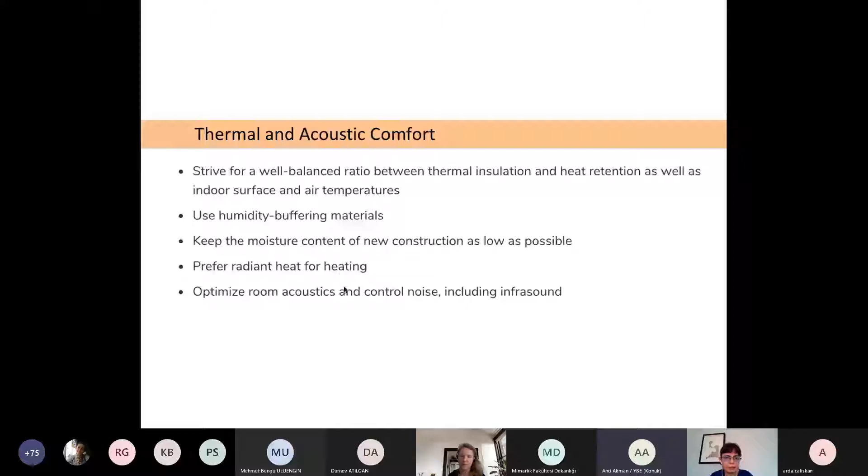The human-based design, harmonic proportions also from cultural and traditional buildings, not to lose this knowledge, not to lose these proportions from ancient times, and trying to transfer them to the architecture of the future. Later on I will show some examples which I think are the right examples for that, how you can take a traditional design and transform it to the future.

Sustainable environmental performances: minimizing energy consumption and using renewable energies. But we see that using renewable energies is not enough to have a good performance, to say it's a green building. We have to minimize the energy for the production of that building, for example. Then we can say that it's a green building.

In Turkey, what we have forgotten, let's say, is providing the best possible quality of drinking water. Today we are buying the water which we drink, paying money for that. But in socially higher developed countries like Germany, for example, the law says that the water which you have in your house, coming from the tap, must be drinkable. You don't have to pay money to drink water, and you don't have to pay money to have fresh air to breathe. It's the same for water and air.

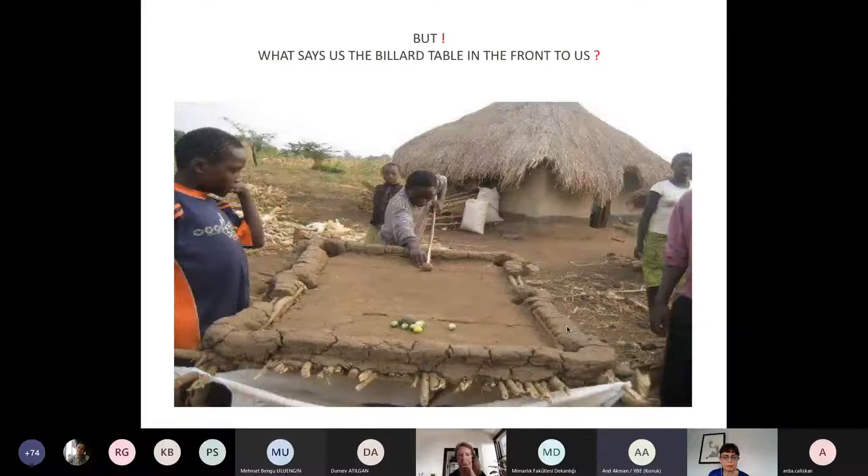So, what says this billiard table in front of that in situ structure? That's the big question. And my opinion is that maybe this billiard table will destroy the process of the social sustainability in this area. And because of this billiard table, a few years later, maybe they will demolish, break down these buildings behind, and will start to make something with metal, or something with bricks, or something which doesn't belong there.

And as an architect, I think that we have to try to see these kinds of pictures in that way. Not just saying, wow, billiard table, what a nice idea, but more thinking about what's the effect of this billiard table. Is it a positive or a negative effect? What will it be?

So environmental awareness is a condition for the formation of an in situ structure in architecture. And that's the big fight in our brain with our ego and our eco. And depending on how much our ego or our eco is developed, we make our designs, or we choose our living spaces.

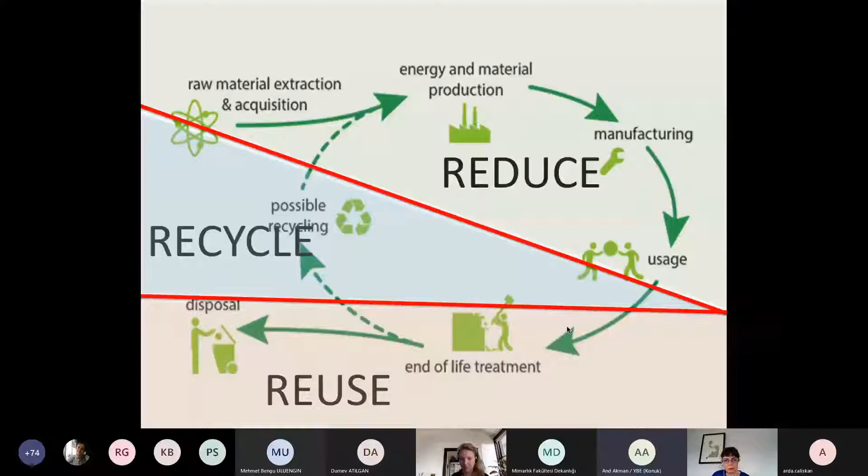So, an example with building ecology. I'm sure you all know this circle with the raw materials, the manufacturing, the usage, the end of life treatment, and then we reuse it or we recycle it, etc. But if we see that with numbers, we see that with the recycling or with the reuse, we can't reach a good performance. The most part of a good ecological performance is in the producing part of the building materials, and we have to reduce that.

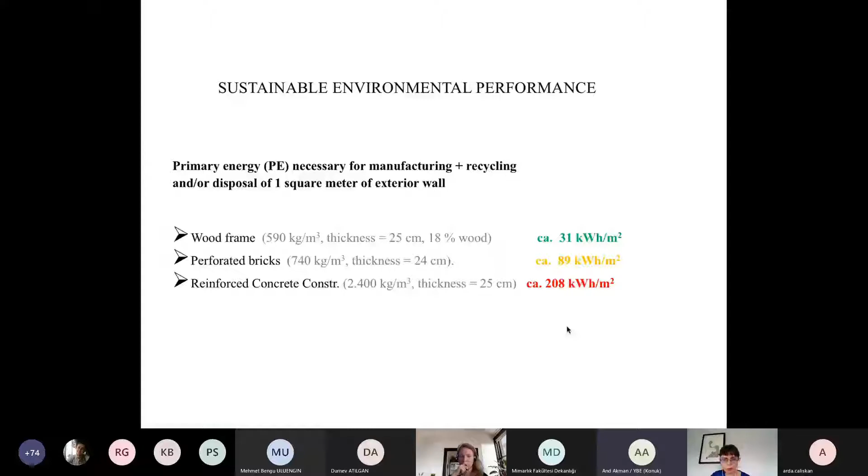So one example with this reduce part, sorry. Let's say, just as an example, we need a window for our building. We design it, and the need is a window. And here we take a decision and say, okay, it's a window, a wooden frame, or plastic frame, or aluminum frame, whatever. As an architect, we have to take a decision. And what we try to reach is in situ building, ecological building, a green building.

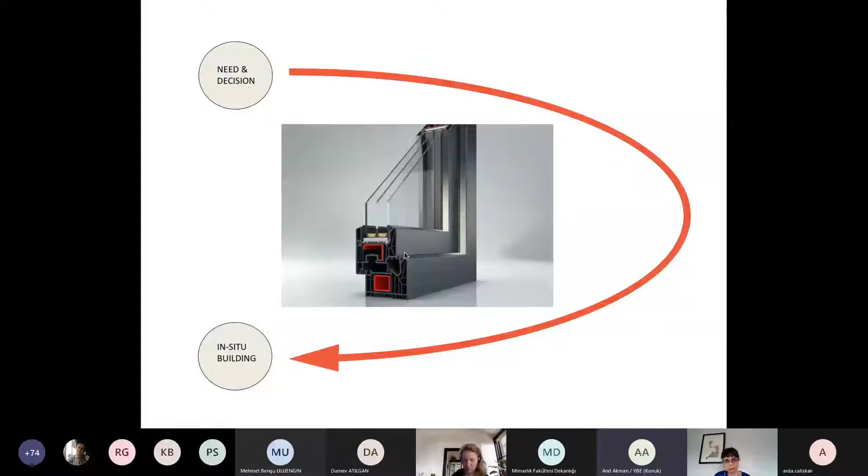So I will pass these slides now like a slideshow a bit faster. What happens? All these steps need energy and resources. Raw material extraction. For that, we need mineral quarries, machineries, organic resources, manpower. Then for the production of these, we need transportation. Again, for the transportation, we need lorries, roads. We have to build roads. We use railway or sea transport, and we need refineries, gas stations.

And that goes on to the manufacturing. Again, transportation is necessary, energy producing is necessary, and after the manufacturing, again, a transport to the dealers. And now when this window has reached the dealer, we as an architect or as a family who wants to build a house choose this window. And again, the dealer needs energy, and again, a transportation. And finally, at the end, with all these things which must be produced, which use energy, we only put the window in our building.

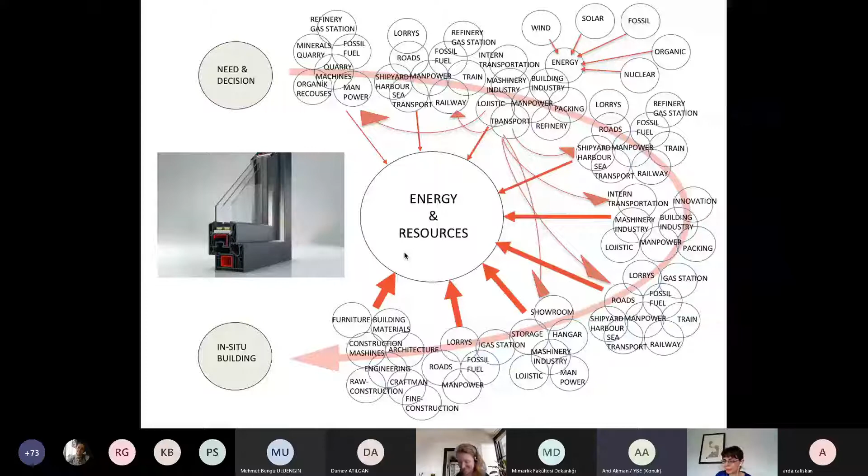That's all, not more. So the difference now in that case, is it a wooden frame window or a plastic frame window or an aluminum frame window? The decision is suddenly getting very serious, because we are responsible for all these consumptions.

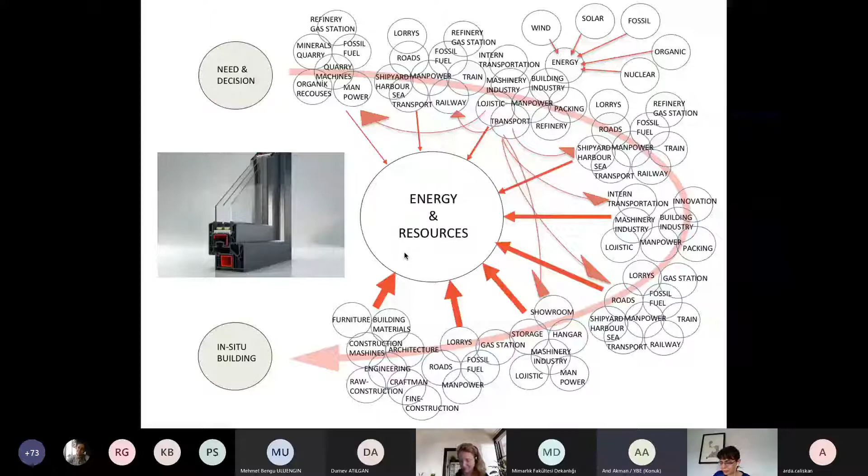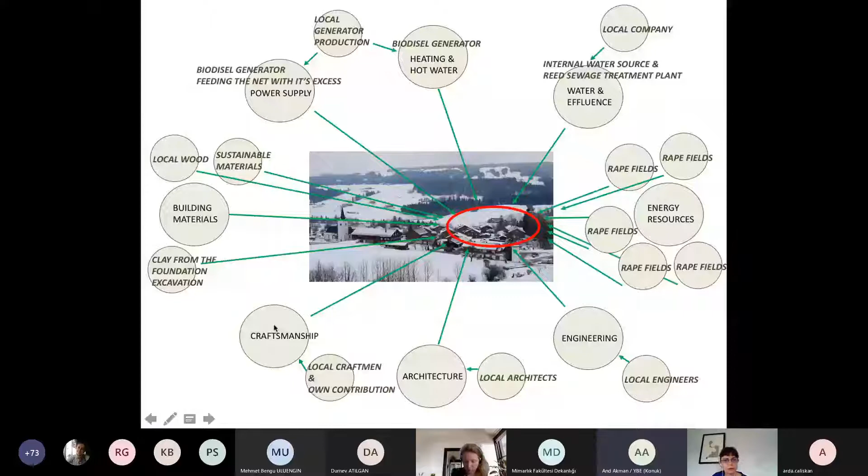And we used local companies, its own water and energy resources, the rape fields, kenevir, and the local engineers, the local architects, the local craftsmanship, etc. So as much as possible, we tried to do that. And as a result, that was this little settlement, 17 living spaces in 8 buildings, made with a wooden frame and adobe bricks and reed insulation, all building materials which don't need much energy to be produced. And another picture from the same, and also the design language is very adapted to the traditional design of the village.

So I don't know how much time I have. Can we have a little? Can you inform me, please?

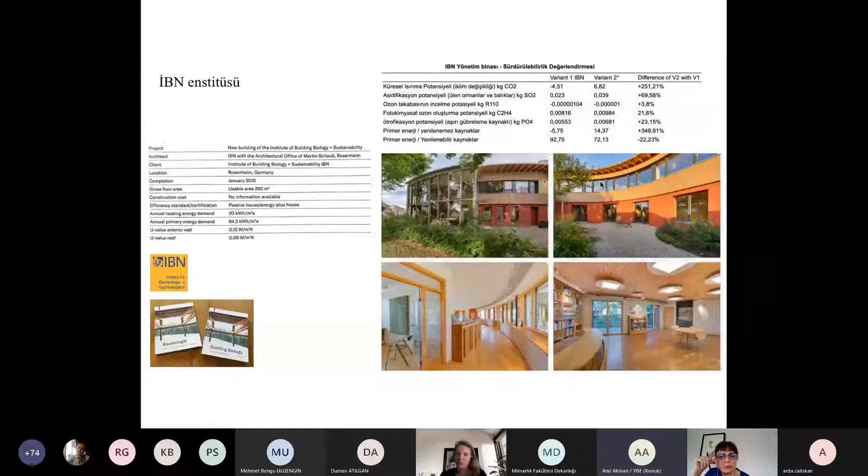But let's save the time. You can read all these values later on and can compare them. I choose only some, let's say, interesting examples, how the performances of these buildings can be or must be. Another building is the Herba Farm. It's in Turkey, close to Turgutreis in Bodrum. And it was a 2016 design of mine. And then later on, these two buildings, Birkhauser in Switzerland published it in German and in English. And in this book were 21 chosen examples all around the world

which meet the criteria, the building biology criteria. And we were very proud. These little simple buildings, they are really very simple, but the publisher chose them, and only 21 around the world, and one of that was this.

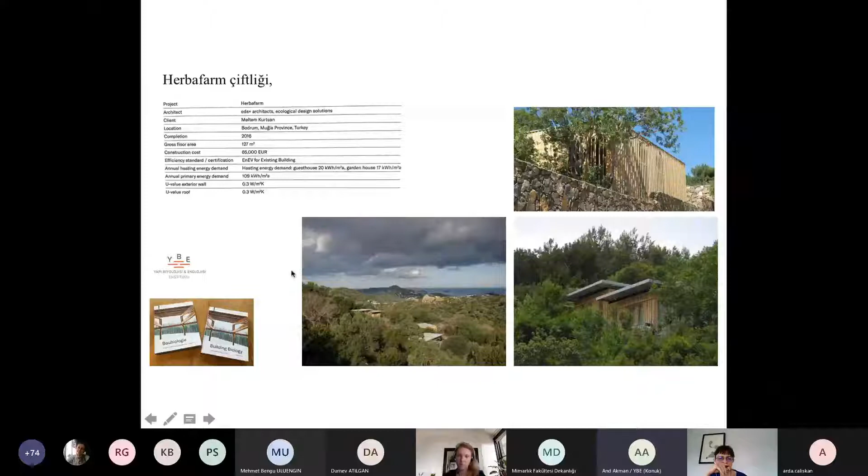So some details from them, with this reed isolation, simple wood without any paintings, etc. And on the left side, these panels, they are not gypsum boards, they are produced by paper, waste paper. And so some building materials, thanks to that building, were firstly produced in Turkey, for example.

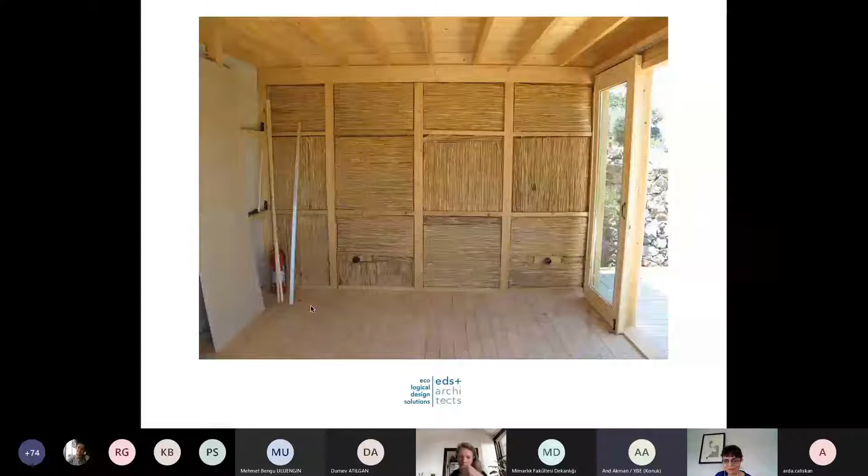Another example is our building now, the biohouse in Kadıovacık in our village. And we made the carbon footprint calculations. Hüdayi Kara did that. And they calculated that the foundations of this house are in concrete and the rest is built in wooden frame and adobe, etc. And 79% of the carbon footprint is caused by the foundations, but the foundations are only 17% of the house. So that also shows the big difference between a reinforced concrete building system and a building system with wooden structure and with adobe.

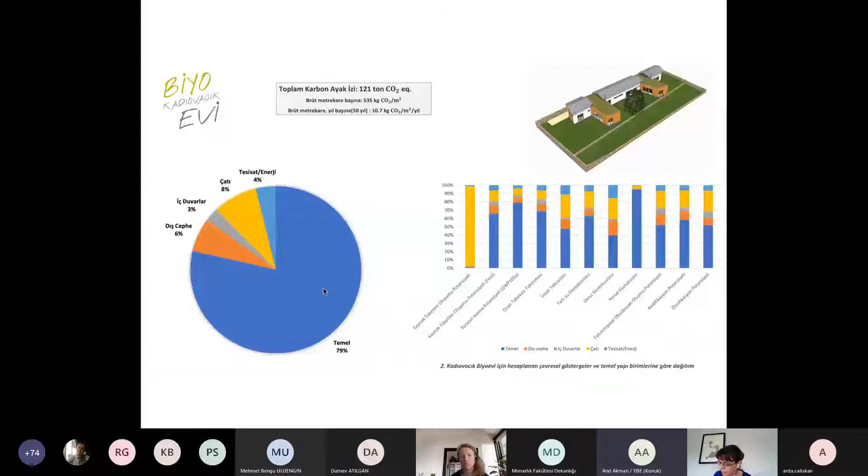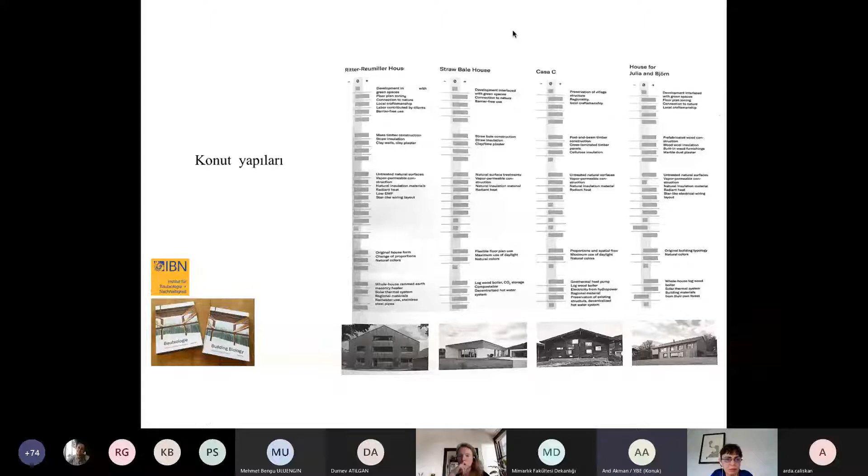So another thing in the building biology is the bioclimatic diagnostic. We are measuring the effects of the indoors of the houses. We can measure, there's an international system, the effects on our health. And we measure the furniture, the electrical system, the paintings, the coverings, and the heating system, etc., with electronic equipment. For example, also the radiation, the formaldehyde gases, the VOCs, and the dust and the mites, etc. And after that, we can say why this building is making us sick.

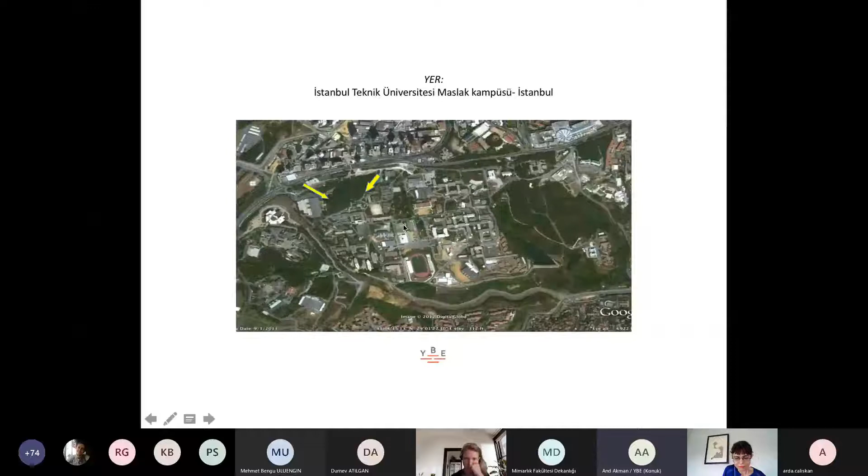We are using this formula when we work, in these three groups: electrosmog, the bacteria, allergens, and toxic influences. And one example was nearly 30 years ago, my PhD thesis in Maslak. It's the Maslak campus of the Technical University in Istanbul. And during that time, there were two little kindergartens. One is this, built with adobe, earthen materials by Ruhi Kafescioğlu. And just beside that, there was a concrete kindergarten. And my work was to compare them.

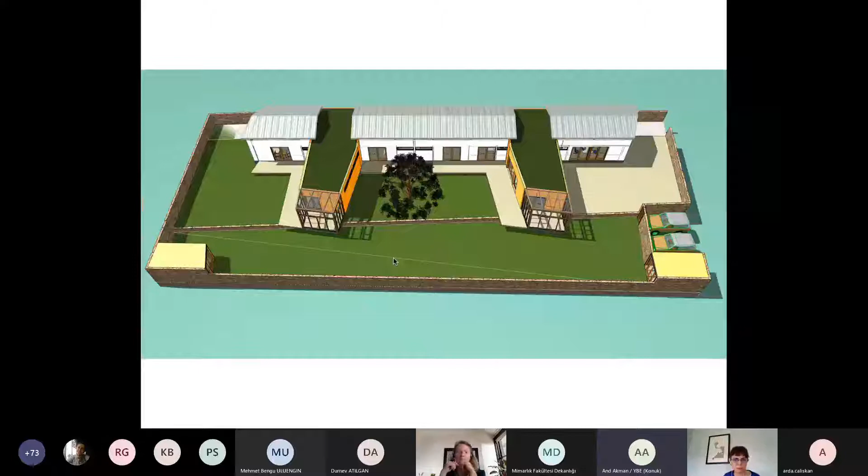Now, jumping back to our house as an important example, it's here between Urla and Çeşme. That's our little village, 220 people are living here. And that's the render of the house, with 3 metal roof parts and 2 flat roofs with earth. The wooden structure, you can see it here.

And the walls are completely different, in 4 different types. The green ones are the walls which have a more heating isolation capacity, and the red ones, looking more to the south, to the southwest, are walls which have a heating storage capacity. So the reason is, from the north, I have to protect the house against the wind, against the cold. I need more heating isolation.

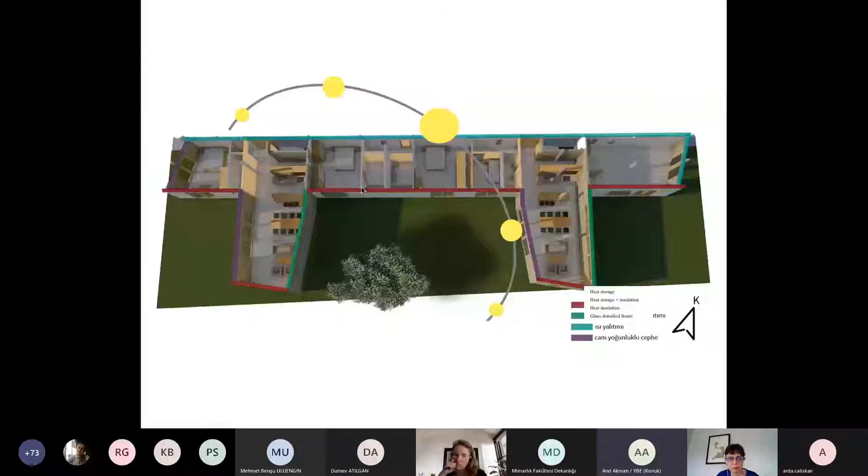On the south side, I have to protect the house in the summer against the sun. Otherwise, I need an air condition. And we didn't want to have an air condition, so these 2 different types of systems were implemented and built here. The direct and indirect sun influence: especially in the summer, this direct influence we don't need, we don't like it because it's too much, and the indirect sun is much more comfortable.

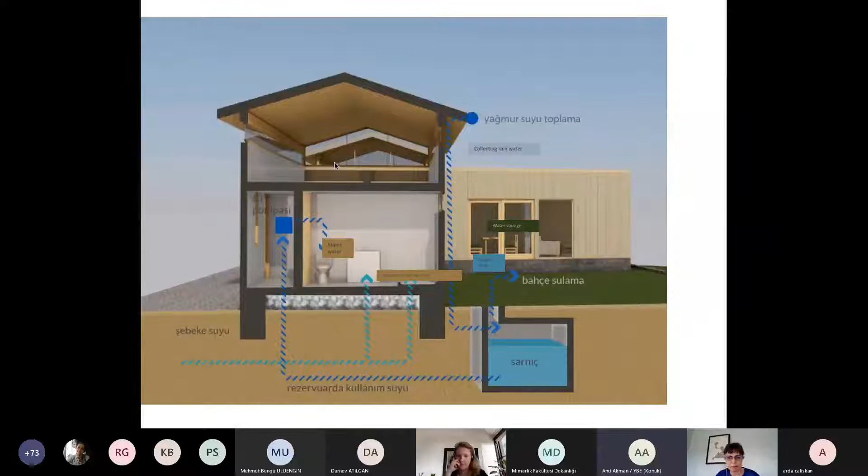And these windows on the upper part are cross ventilating windows. The location of the house is very windy. We use that wind to keep the house cool in the summer period. The wind goes in from one side and goes out from the other side. We have a cistern collecting all the rainwater from the roof, and we are using this rainwater in the house. And sure, these thermal collectors for the warm water.

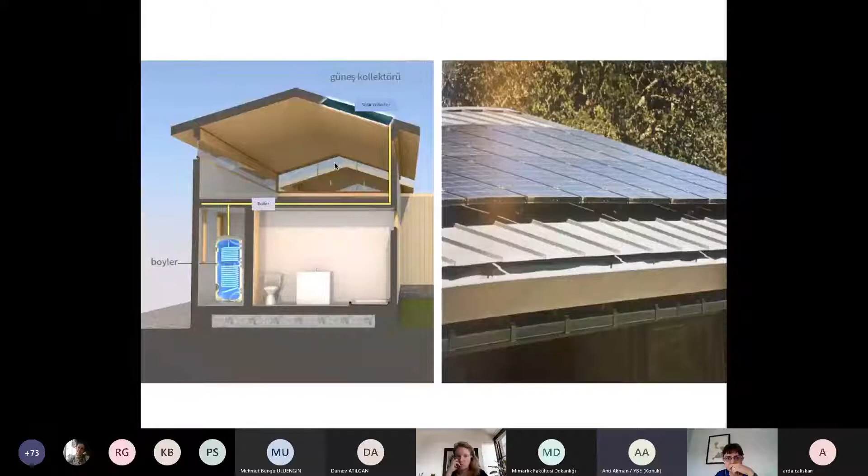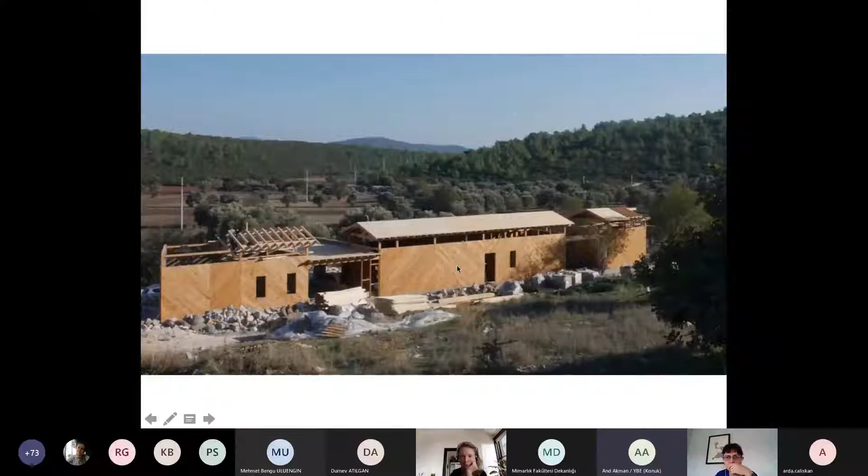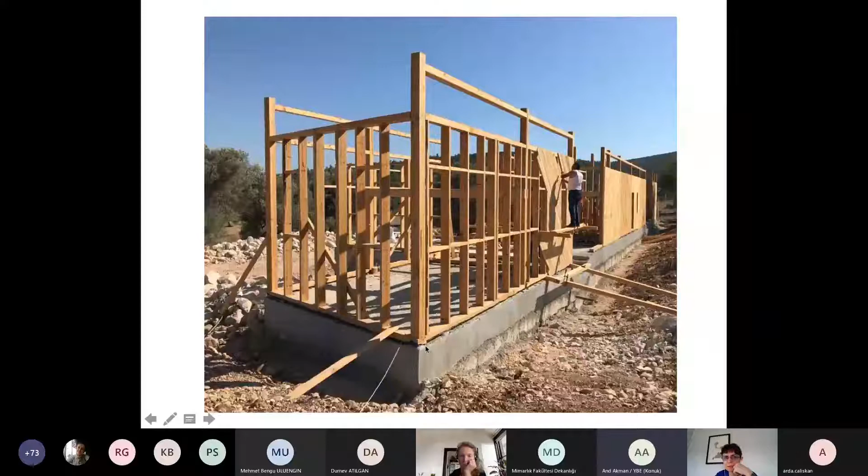And now at the end, some pictures from the construction, how it was constructed. Here on the outside, we have this diagonal covering, again with wood. And we made that instead of making diagonal structural elements in the structure. I didn't want to do that, and the reason is to have very clear forms everywhere, not triangles, because if I have triangles, filling them with adobe bricks or some other materials is not so efficient.

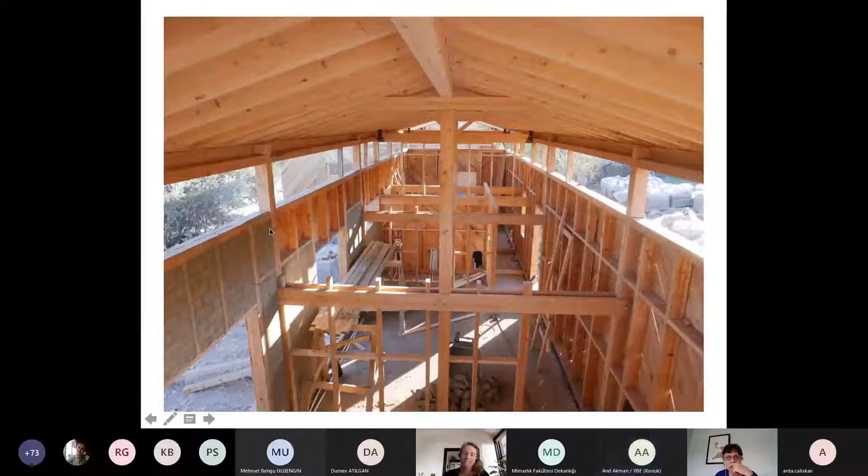Here we can see the roof, and that's, for example, the north side. On the outside, there is this heat isolation; we use this reed, 5 centimeters, and then these adobe bricks. On the south side, we don't have this reed, we only have these adobe bricks. And then we use these clay panels. They are used for the first time in Turkey in this building,

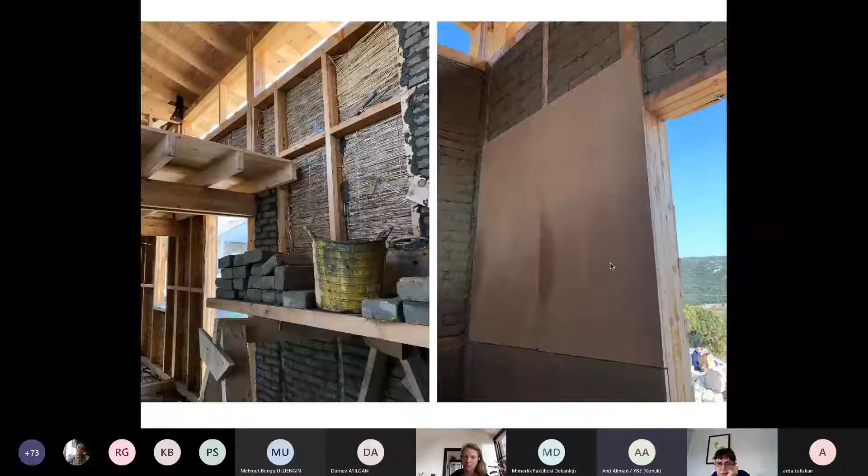clay panels. And in these clay panels, we make these wall heating systems and then the clay plaster. So the heating system is a radiation heating system with a very low temperature, but on a surface as big as possible. And the roof heating isolation, then this metal zinc for the roof.

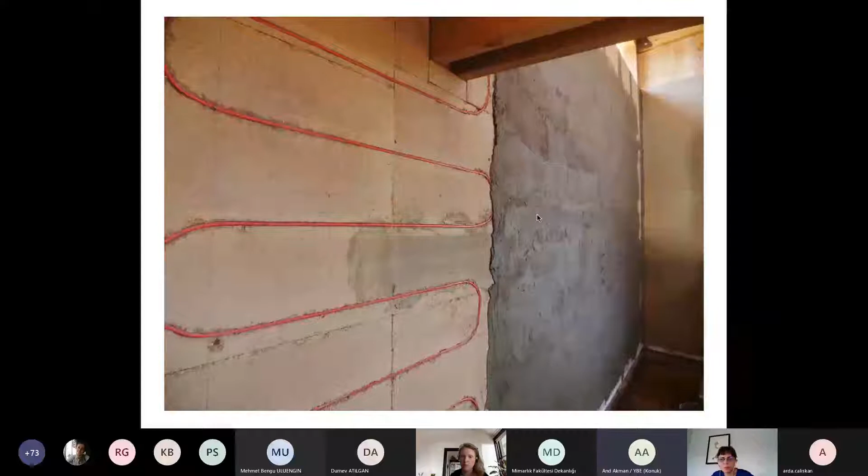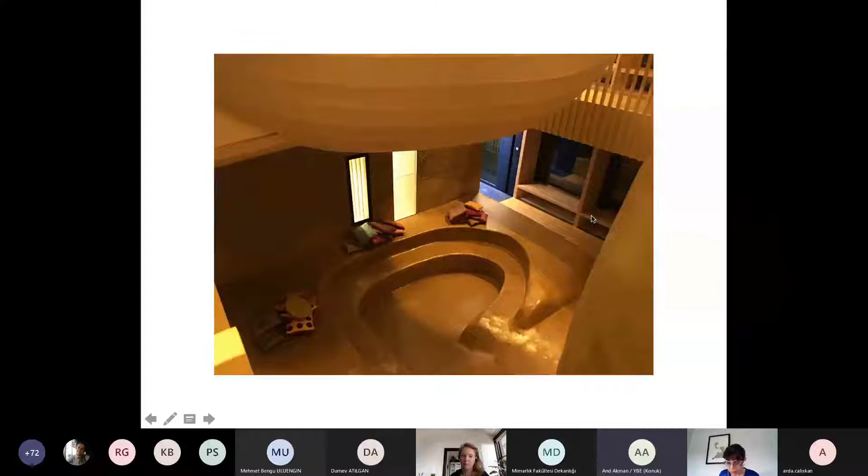The Omikron campus is a very important example because it shows us that with earthen materials, with natural building materials, we can also build in a bigger way. We can also build schools. We can also build commercial buildings. We can also build buildings where hundreds of people are working inside. It's possible.

Sorry, that is again the biohouse. And the last example I want to share now is in Switzerland, in Claro. Trissel is the family. And I worked on that design in 1998, years ago. So the most important thing about this building is that it doesn't have a heating system. It's at 1,650 meters. Now I can show it here.

This house, and behind it is Bellinzona, and Basodino, the mountain, more than 3,200 meters high. The location was very interesting because it's in the Alps, in the mountains, and the reason why we could build it without any heating system was that in the winter the fog is in the valley, but not here where the house is. So it has enough sunny days.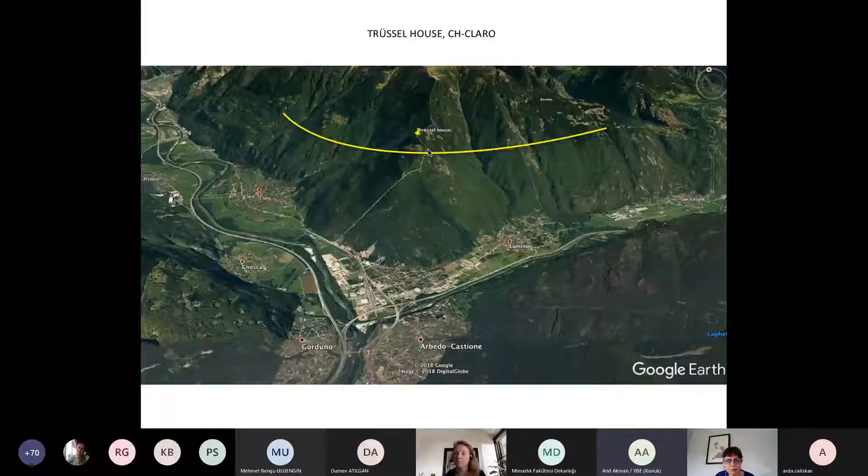This shows it better. Now Bellinzona, the valley bottom. This is the fog zone. And the second is the shadow zone, because it's in the mountains, and on the east and the west are again mountains, but the location of the house is here, so it had enough daylight during the day. So that's why we could design it with a passive system.

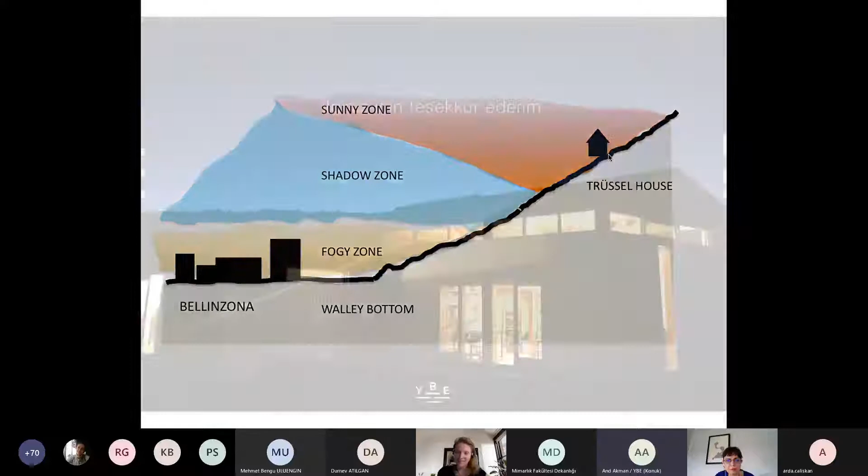Sorry, let's go back to this. Okay. The south facade is a 60 centimeter thick Trombe wall, an earthen wall. And here you have this winter garden, and thanks to this winter garden, this Trombe wall is heating the house. The other facades, the east, west, and north facades, are completely covered with thermal insulation materials.

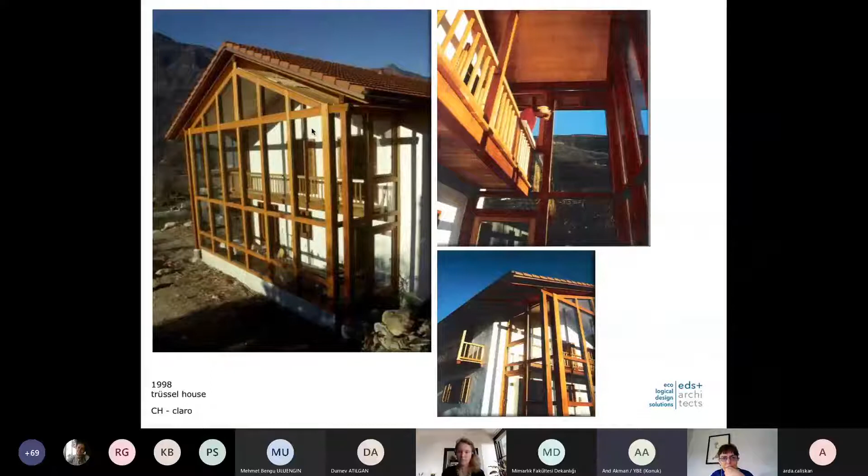So that example showed us that by studying the location and the climate, if you know in the winter how long the sun has an influence on the location, how many sunny days, how many rainy or snowy days there are, etc., you can bring this information into your design. In the winter it's permanently below zero degrees, but even under those circumstances it was possible to make it without a heating system. So let's go back, and that's the last one now.